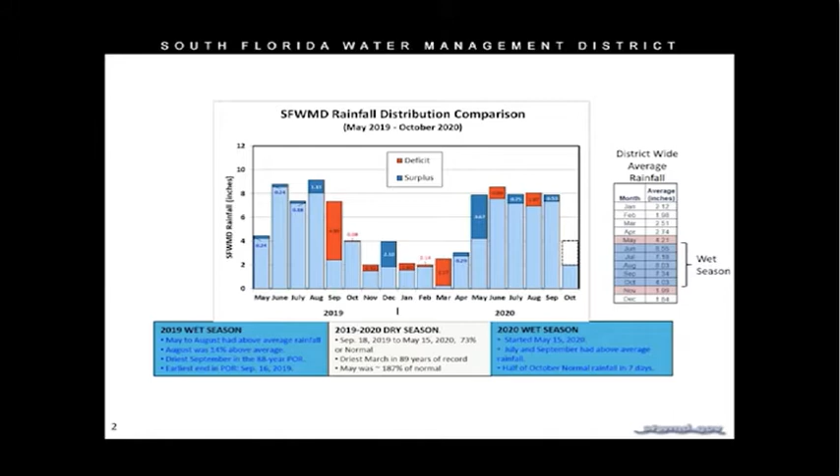These maps represent everything that we saw through September, and we were slightly above average through September in terms of wet season rainfall. But again, when the numbers come in October, all of those numbers are going to go up considerably.

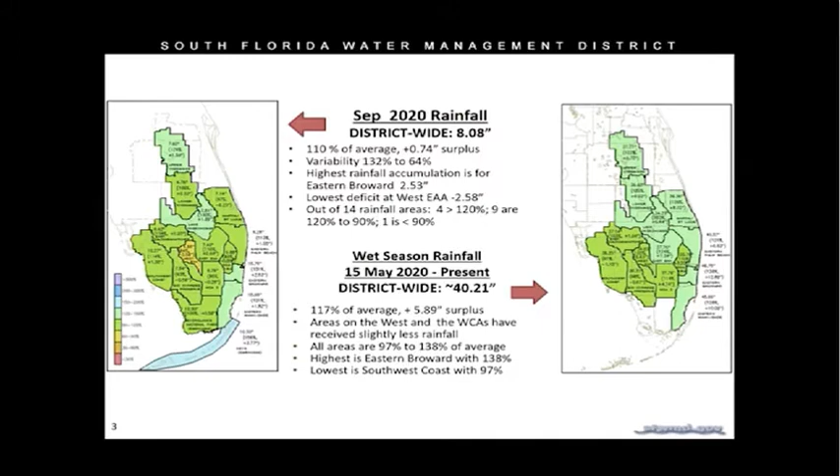So lake level, around the beginning of October, we sat at right about 16. The lake continued to rise, as you are aware, got as high as just shy of 16.4, and then discharges started, and the lake is now receding. So it's on its way down, it's down around 16.1, I believe.

There is a website update that you can go to now at sfwmd.gov that shows all of the inflows to the lake, all of the outflows with directions, how much is going east, how much is going west, how much is going south, evapotranspiration numbers, so you can get the net water budget of the lake anytime you want to see it, and that's updated daily.

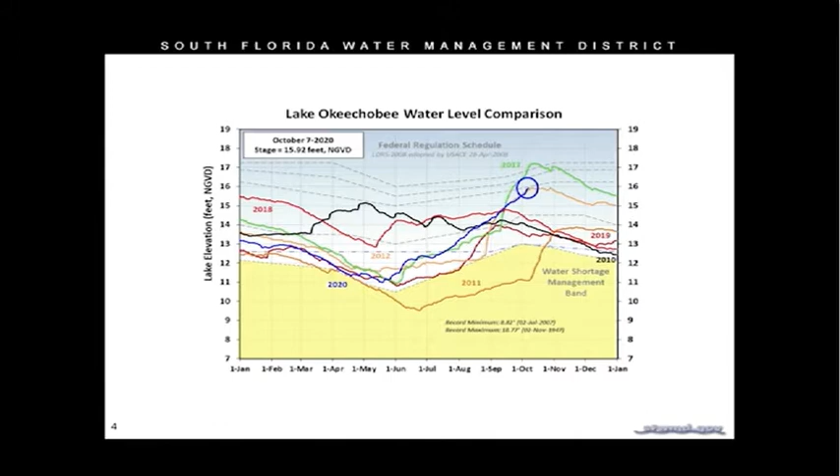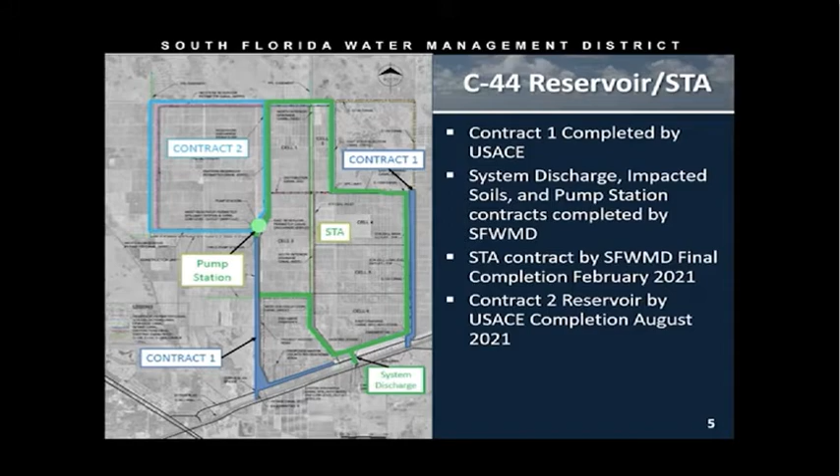And so that's kind of the conditions that we find ourselves in today. Moving on into the projects, some good news. C-44 reservoir and STA, we're down to our final 2 contracts. If I can get a laser pointer going here, we've got the STA, 6,400 acre STA, and then the main reservoir. The last 2 contracts of the project are underway, and we're getting pretty close to completion on the STA.

So this is some of the work that Bergeron has been out there doing. They've got the distribution canal, a lot of the STA embankments, the roadways, control structures, et cetera, finished. And so this is kind of looking at some of that finished product. This is one of the canals that runs straight north and south through the facility.

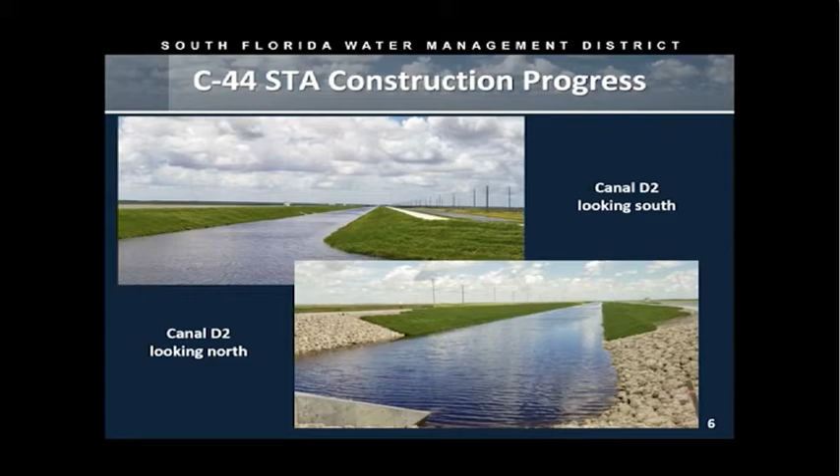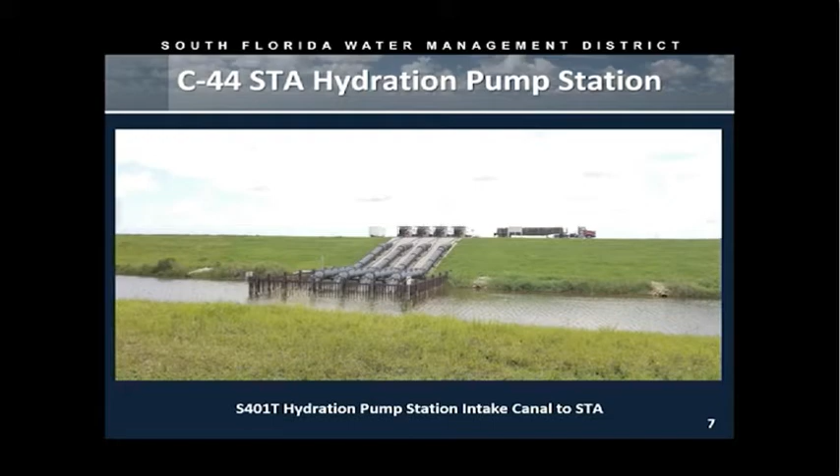This is the pump station, the temporary pump station that we installed that allows us to draw water directly from the C-44. So this body of water connects by gravity to the C-44 canal. Once we get the STA up and running, we can run, well, we've already run these pumps to hydrate some of the STA cells as they've finished. So while the Corps is working on the reservoir, we can take advantage and get early benefits, early grow-in of vegetation in the STA by way of these pumps. So these pumps take water from the C-44 and put it into cell 2, which can feed the rest of the STA cells from there.

We've also got cell 5 done. So right now, the only one that remains is cell 6. Once that's done, we will have met substantial completion for the project, and we can operate the entire STA facility as a whole. Because of those October rains, we were expecting substantial completion to hit right around now. But because of those heavy October rains that you all talked about and that I mentioned earlier, that's pushed some of that work out. So now current projection is that we'll be able to finish cell 6 and hydrate it mid-December.

Moving over to the other coast, to the C-43 reservoir. Very large project. We started back in November of 2015, and it will ultimately store 170,000 acre feet of water on a 10,000 acre footprint, storing water at an average depth of about 19 to 20 feet.

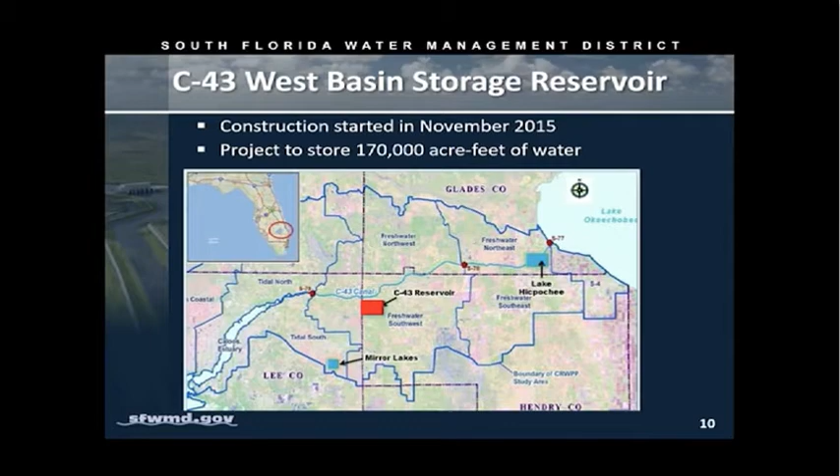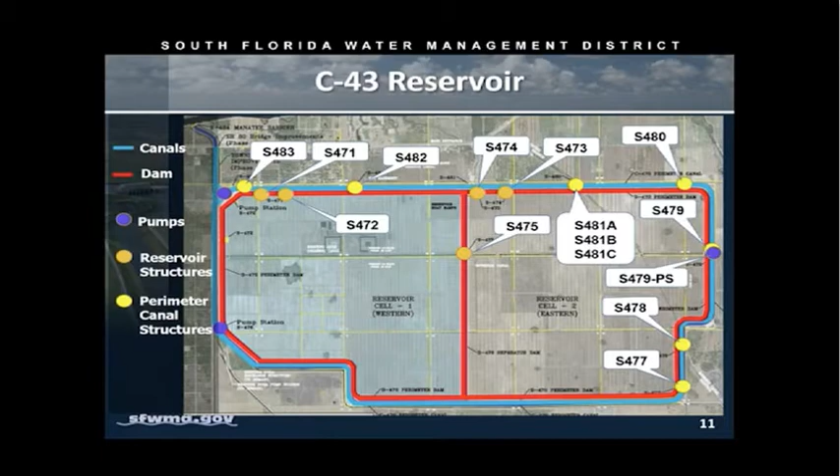And so this is just a refresher showing the key components of that facility. It's a 2-cell reservoir, numerous gravity control structures, a main inflow pump station located here that will draw the water from the C-43 canal into the facility, and then an irrigation pump station that will allow water to continue around the southern end and feed the farms over to the east.

So there's two major contracts going on right now. One is the inflow pump station that I just mentioned. A lot of progress out there so far on this one. The pump gallery walls have been poured, so you'll see a lot of concrete work in the subsequent photos. The 84-inch discharge pipes within the interior of the station have been constructed.

You'll see a partial communications tower. We've got 220 feet of the 300 installed. And then you'll see the improvements to the Townsend Canal that allows us to draw water from C-43 to the pump station. A lot of that work is also in. Just as a refresher, this was a $60 million contract awarded back in March of 2018.

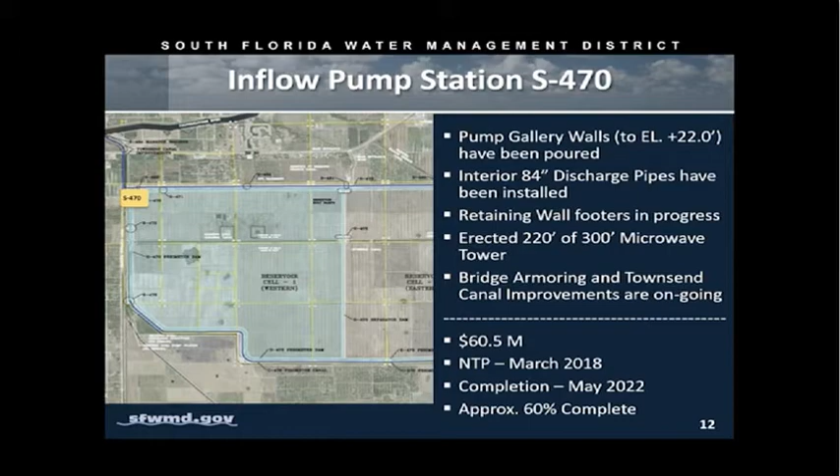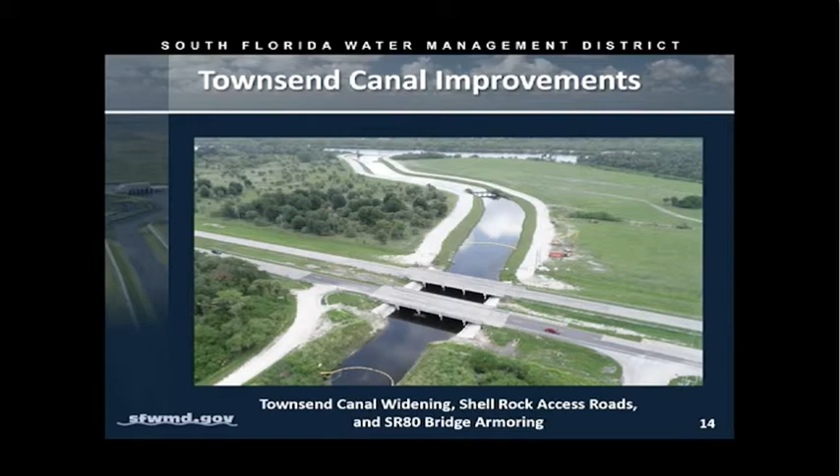An appreciation of the scale. Townsend Canal improvements, like I mentioned, we've got the canal widened. We've got TRM and planting done to stabilize the banks, and we've got armoring that was installed under the bridge to protect that area. This is just so we could take additional amounts of water beyond what the original canal cross-section was designed for out of the C-43 and put it into this facility for storage.

Getting into the large contract, the embankment contract. So there's 19 miles of dam embankment. I'm just going to pick off some of the highlights from this, and 15 miles of perimeter canal. The embankment is highly engineered. It's got a cutoff wall. It's got a drainage blanket associated with it, all for the purposes of dam safety, so that when you store that 20 feet of water on average, you minimize the concern with breaches. Obviously, that's important.

Again, this is a $524 million contract.

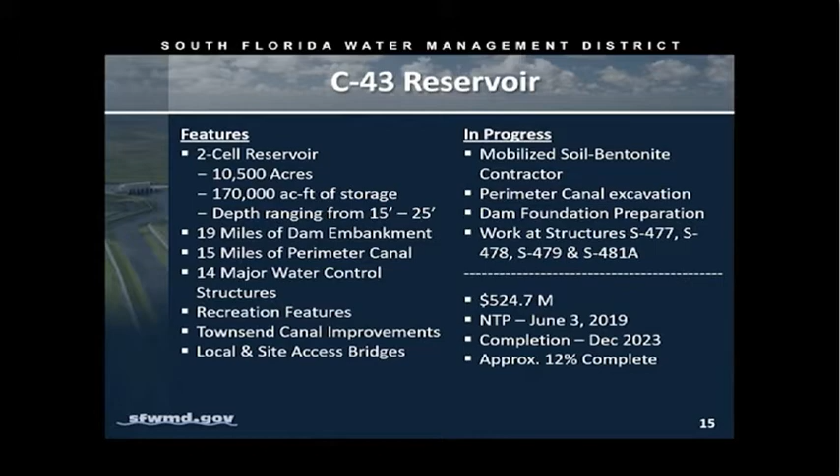And then the reservoir water would be stored over here. So this is the prep work that's being done in anticipation of building up those lifts of embankment. So you've got this clean sand that's being installed here for the drainage blanket, and then you've got the prep here for the soil bentonite cutoff wall. And so you can see the differences in material that are being installed there. And then, as I said, this embankment will be built up from there. So this is just kind of laying the foundation work for it, going all the way around those miles of perimeter that I mentioned.

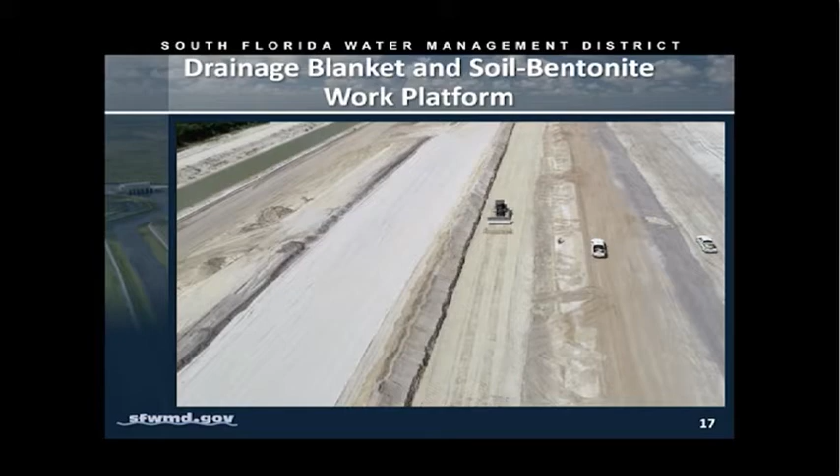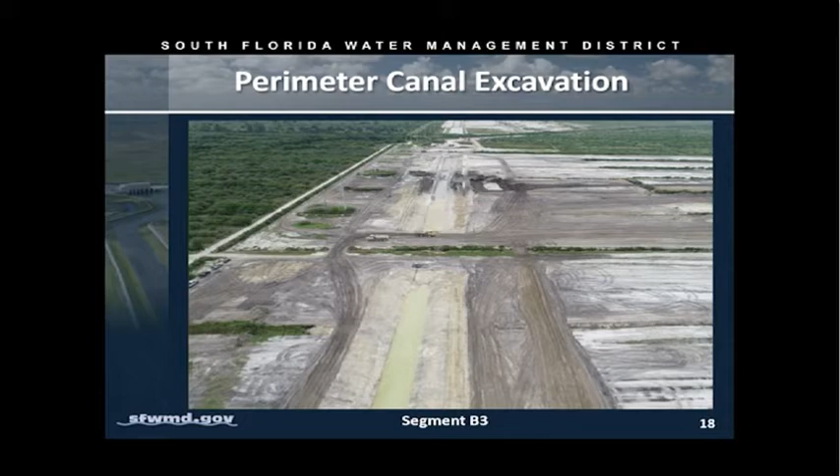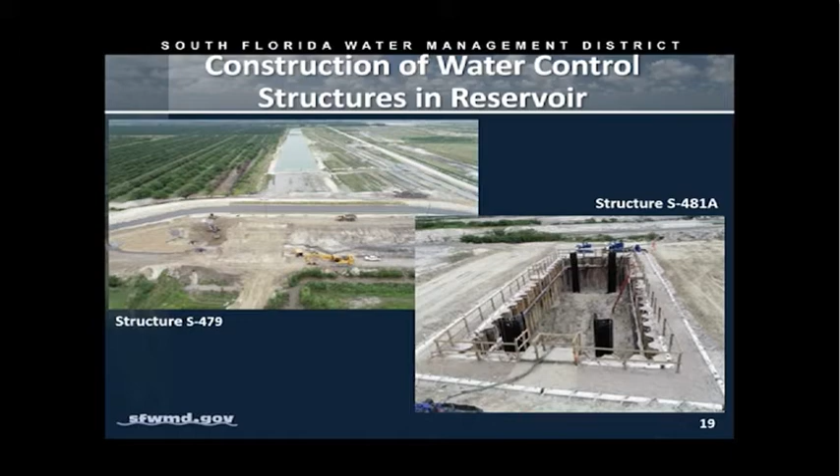And then, so this is just progress photos of that perimeter canal excavation that were shown in that previous picture. And then some of the control structures are underway. There's numerous gravity control structures that stage water from high to low as you work around the perimeter of the facility. And so obviously that work has started in earnest as well.

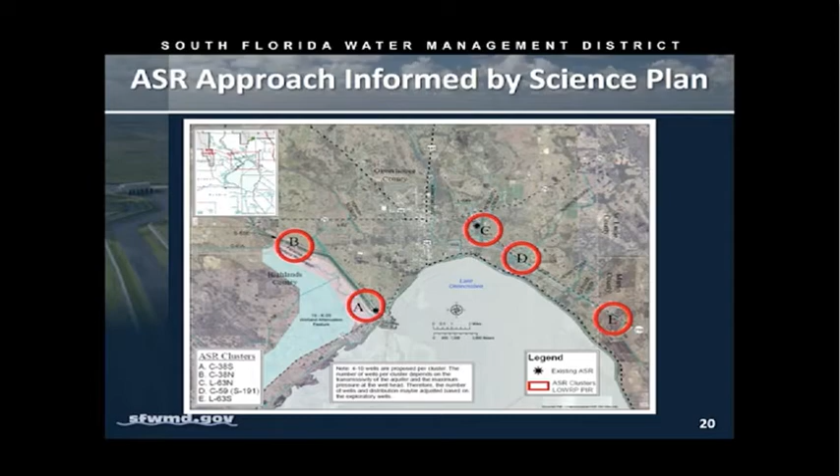Moving on to some storage north of the lake. Our ASR program, informed by the science plan, is moving forward. And so right now, as part of that science plan, we're doing a lot of exploratory work and research work on what's down there in terms of ASR. So as part of phase one, we're completing an evaluation and hydrogeologic assessment at C38 South and North, and then L63, C59, and L63 South.

We're drilling 2,000 feet down in those areas. We're also doing exploratory wells of the upper Floridan aquifer, and we're getting some of the existing facilities that were out there back up and running. The existing L63N and the Kissimmee River ASR pilot were out there, were built several years ago, and so we're doing some work to see what it's going to take to get those back up and running.

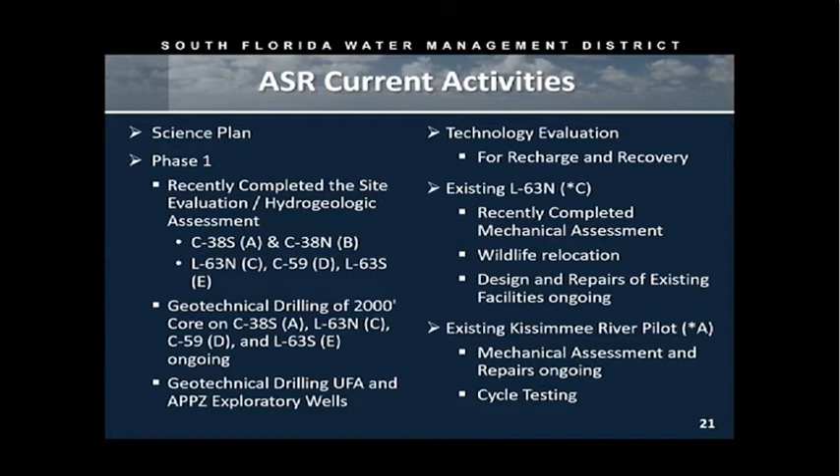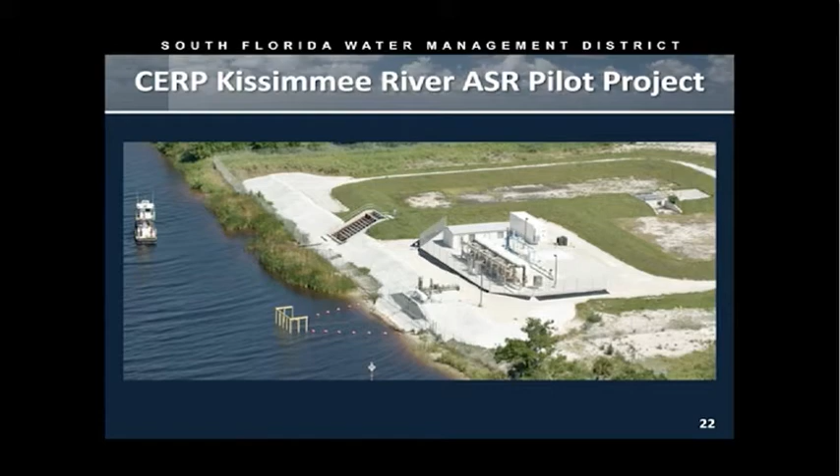And then moving on down to the south, we recently had a groundbreaking and a ribbon cutting for a couple of different features of CEPP South. All of these projects work towards the initiative of getting water out of WCA 3 and down into Everglades National Park. And so the Corps held a groundbreaking on their culvert project, which will take additional water from WCA 3 and allow it to move down to the S333N structure. And then eventually that water makes its way down into the park.

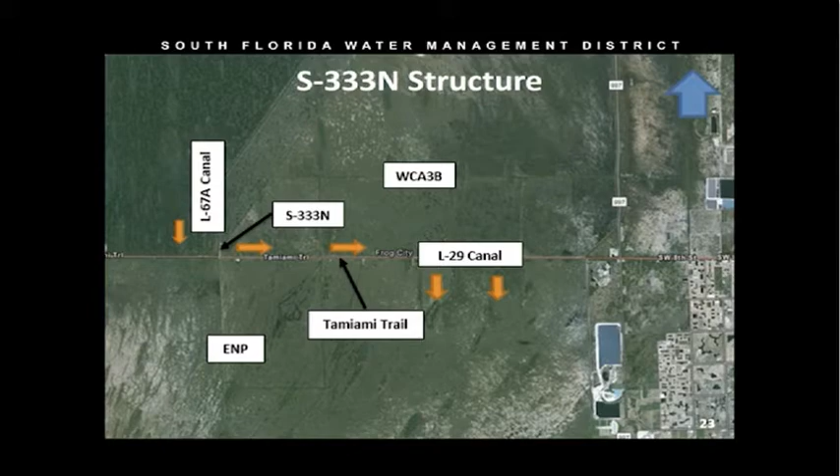At S333N, before there was just this one gated structure, and all of this levee was located here, such that you only had one route for the water to go. So for all this water coming out of WCA 3, it had to go through this single channel. We've since doubled the size of that, allowing us to double the amount of water we can send south to the park. This levee has now been moved over, this channel excavated out, and this brand new control structure constructed so that we double the amount of water that comes out of this area and then moves east and eventually south to the park.

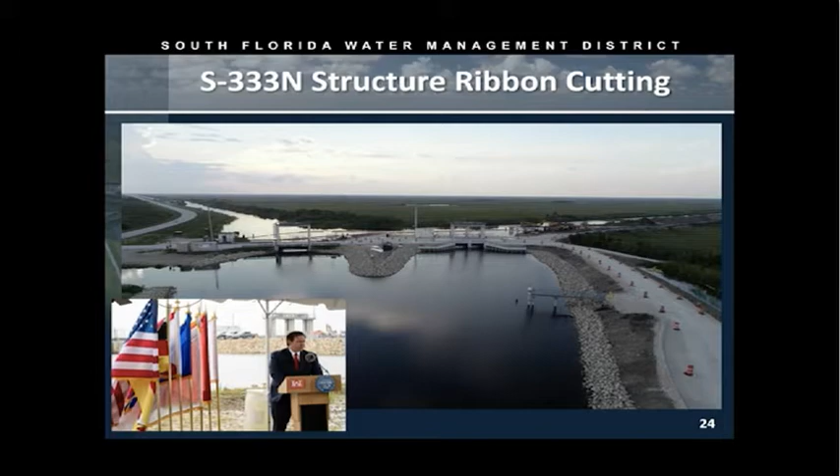Also south of the lake, we've got our Bolles Canal related improvements, which will allow us to send additional water to A1 FEB. We've got segments 1, 2, and 3, and the Jet Farms Bridge and Duda Road are all complete and constructed. The canal has been widened and deepened in those areas. We're currently working segment 4, shown in yellow, and we've got design underway on segment 5 and these 3 bridges. With all of these improvements, the entire reach of L16 between the Hillsborough and North New River will be finished.

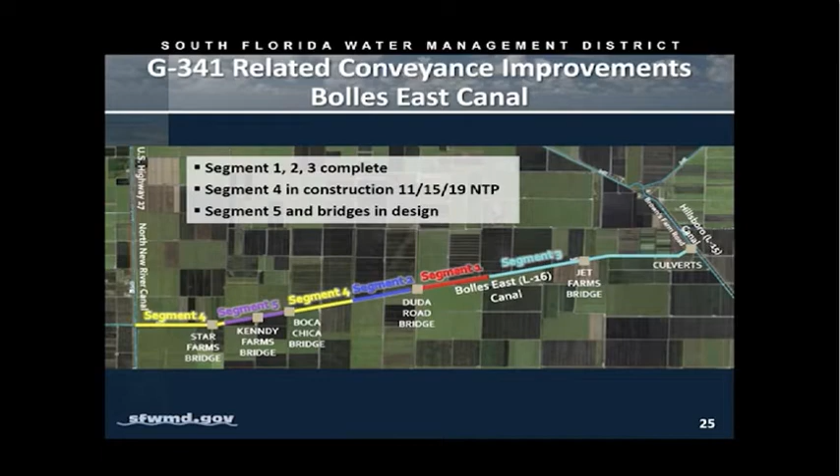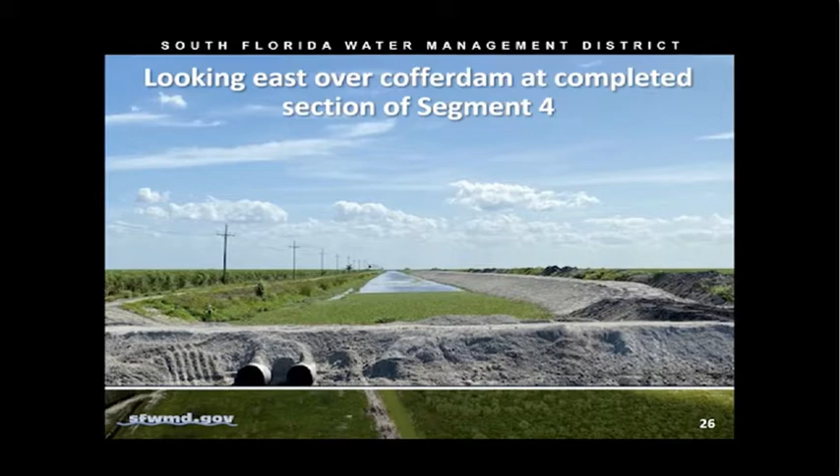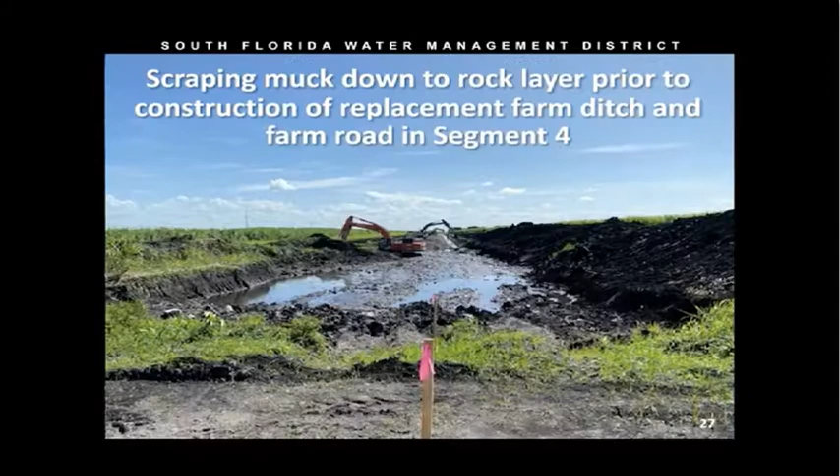This is just a typical section looking at the improved canal once it's been deepened and widened. Before we started out here, this canal was so shallow that birds were able to walk across it. Also off to the side of the canal, we have to replace the farm ditches and farm roads that were out there in order for those operations to continue once the project is done. This is just a shot of that work going on in conjunction with the work on the main channel.

Last but not least, the EAA Reservoir and Stormwater Treatment Area project is underway. This is a project to store 240,000 acre-feet of water in the reservoir and provide a new stormwater treatment area totaling 6,500 acres. The Corps has the lead on the reservoir and some of its associated features, and South Florida Water Management District has launched out on getting the STA piece done. Our focus is here on the STA, located on the west side of the property of the A2, and then the Corps has the reservoir contract.

Let me back up one slide. So as part of the early work that we're doing on the STA, we need to get a canal constructed that will run from the Miami over to...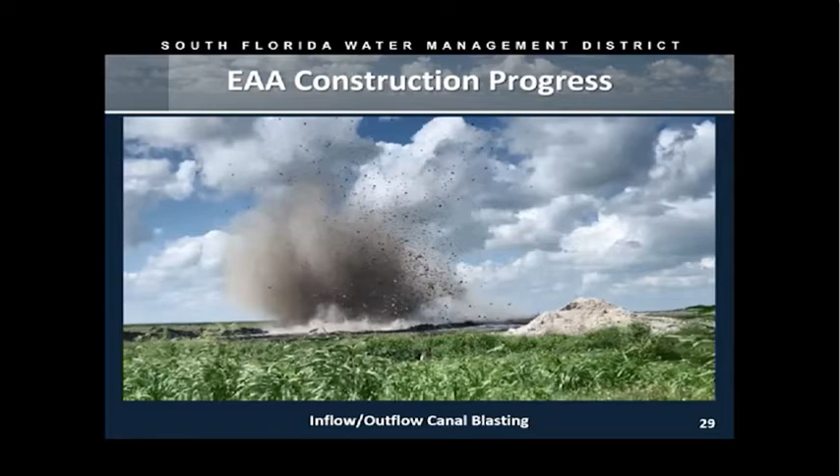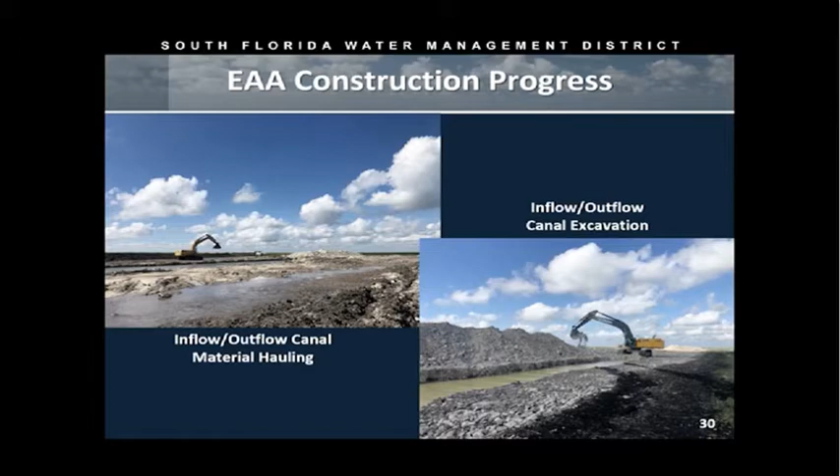It's obviously a highly coordinated setup. The guys that specialize in that blasting do a great job, and you can see it goes right down the line in a timed, progressive kind of approach. They're not just out there willy-nilly blasting holes. It's pretty neat. Once they're done, the excavators can come in, dig out that material, and move it to where it needs to go, and then you've got eventually an inflow canal.

As I said, Water Management District has taken the lead on this STA area, including clearing, grubbing, and muck removal contract of that canal footprint. That's already done - that vegetation removal contract is complete. Inflow-outflow canal construction is underway, and next month we'll be completing the stormwater treatment area design and putting that out to bid. That's for the entire embankment, control structures, and associated levees within the STA.

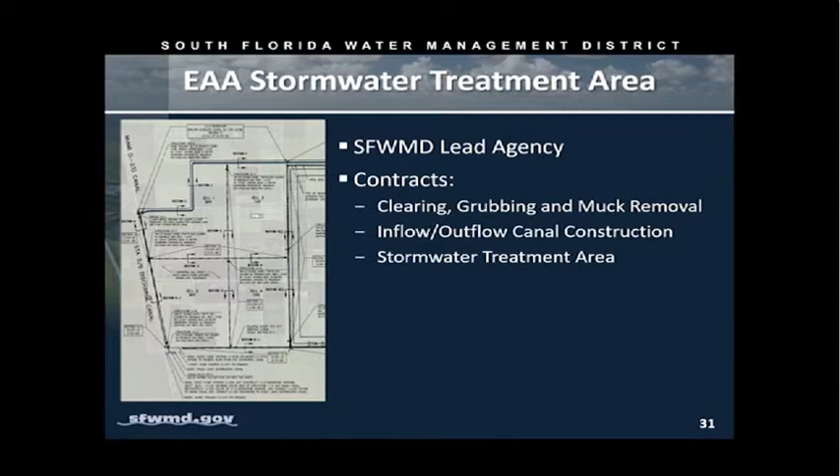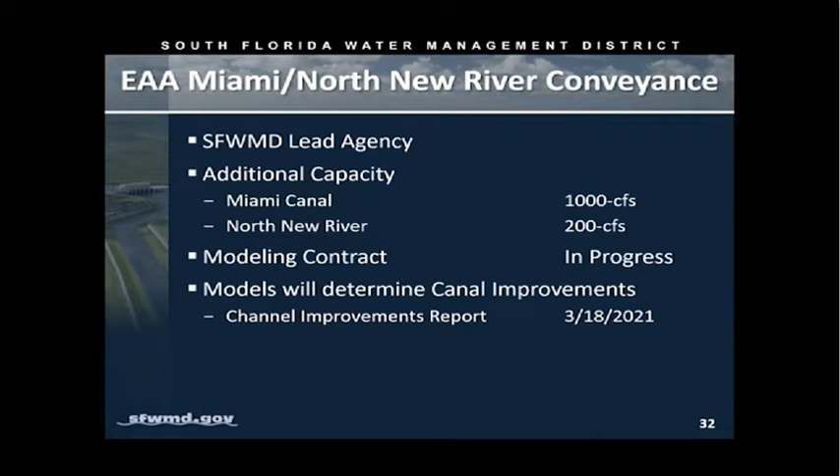We also have to do some improvements to the Miami and North New River canals in order to get that additional water down to these facilities. We're doing a bunch of surveying and modeling right now to identify what improvements are needed to send an additional 1,000 CFS down the Miami and another 200 CFS down the North New River to feed these facilities. We've got a report coming out as a result of that surveying and modeling in March.

As I mentioned, the reservoir side is being handled by the Corps, and they'll have the main embankment contract, also a seepage canal, a main inflow pump station. They'll have bridge widening at US 27 and their own section of inflow-outflow canal, where they're going to basically pick up where we leave off and connect the inflow canal over to the North New River. So basically what you wind up with is a full section of inflow canal that can draw from either source, North New River or Miami.

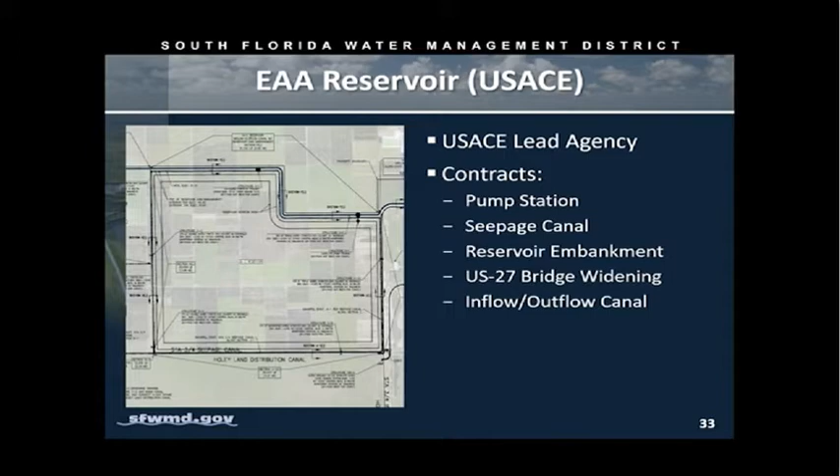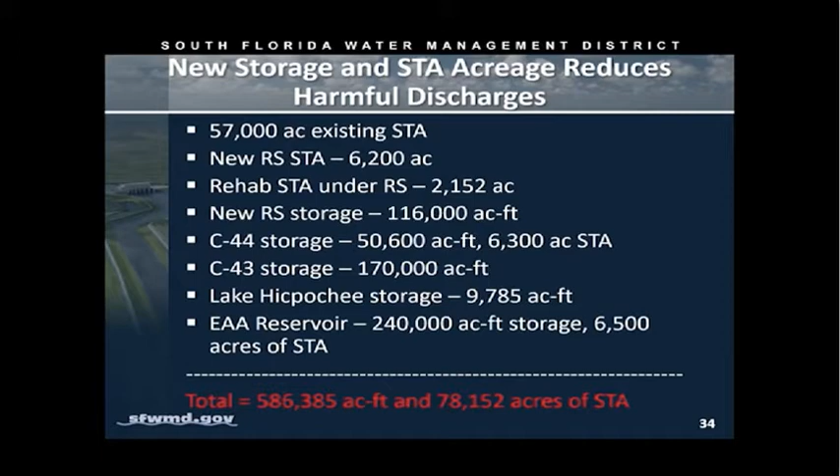This is the slide that Commissioner Smith requested quite a while back, and it's got all of the new storage and STA acreage that's underway and helping reduce the harmful estuary discharges. Since the last update, I believe the only number that's changed is I went ahead and added the Lake Hicpochee Phase 2 storage to it, since that project is now underway. With that, I'd be happy to take any comments or questions.

Mr. Smith? No, just thank you for that. Kurt? Thank you, Mr. Chair. Thanks, Alan, and Drew, really tremendous progress. Really appreciate everything you guys are doing without missing a beat, with everything else that's going on. Certainly commendable to all of you and your staff.

Just on the ASR, I was curious, are we good with that? We're pleased to see that going forward. Is the legislature still supportive? Where are we with support from the legislature on moving forward with the program?

So the last two years, they've given us $50 million per year. I don't know how this year is going to look just because of the funding situation. As far as CERP funding and water quality funding, that's all funded through the Land Acquisition Trust Fund, which is funded by doc stamps, which seem to be doing okay from what I've seen. The ASR technology has been funded by general revenue at the legislature the last two years, which is going to be more difficult. But I've seen a lot of legislators be supportive of it, and I think, as we know, the solution to a lot of the problems down here is storage on all four sides of the lake.

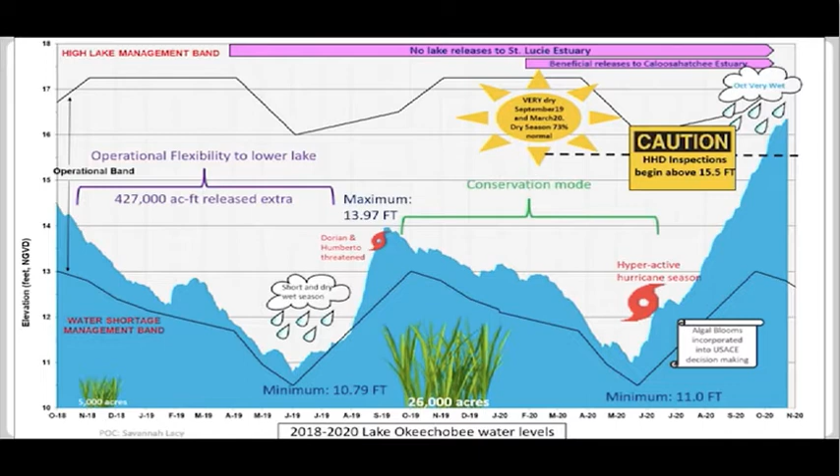Unlike the past couple of years, we're walking into the dry season significantly high. We've got a La Nina on the way, which, if you believe that, looks like it might be a bit drier than normal. So as soon as I can get out of this day-by-day decision-making process, we'll articulate our long-term strategy to get back to where it needs to be at the end of the dry season, so we're in good position again next year. More to follow on that for sure.

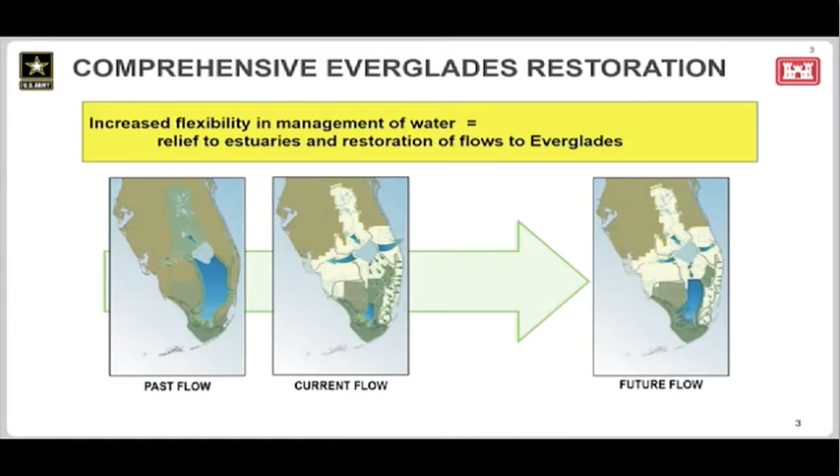Now I'll switch gears and go into the broad picture of Everglades restoration. I think everyone's seen this - this is kind of where we're trying to get to: the historic system, what the current system is doing, and what this enormous program is trying to get after. I will burn your eyes with an eye chart right here.

We do this publicly - we just announced at the Everglades Task Force the integrated delivery schedule. The only thing I'm trying to highlight here is this year's IDS. We put a big focus on trying to relate the plan, the 2000 yellow book, to the current actions, current projects, and upcoming studies. We tried to do that direct linkage, and we also tried to demonstrate, on the backside of this, where the operations manual and the execution of moving water actually occurs.

Typically we finish a project, we have a period where we develop the manual, and then we start execution of the manual. What we're trying to do in each of these is get a lot more adaptive management and flexibility into those manuals to handle the one-offs. So it's not a specific issue where on a given date three years from now we know a structure is going to close - that doesn't work. It guides us in the big picture. The models show us what's happening, but we've got to have more flexibility in how we operate each of these once they come online, because we're in that period where we're putting a heck of a lot of infrastructure on the ground.

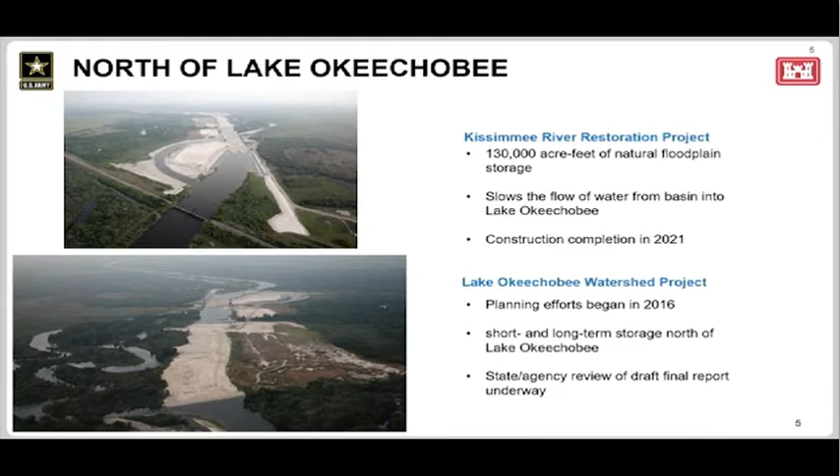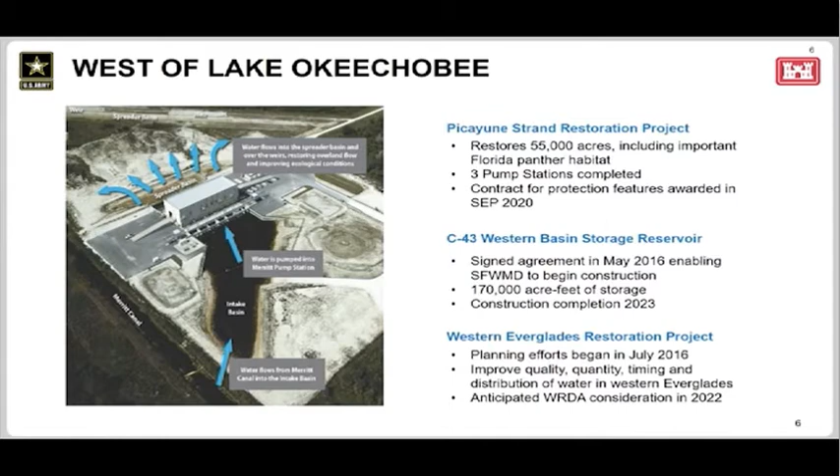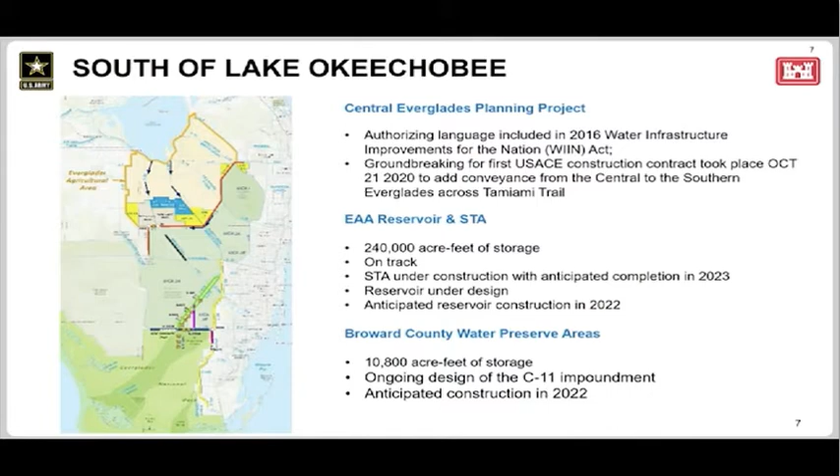And then Broward County Water Preserve Area - construction beginning in 2022 is where we think that one stands.

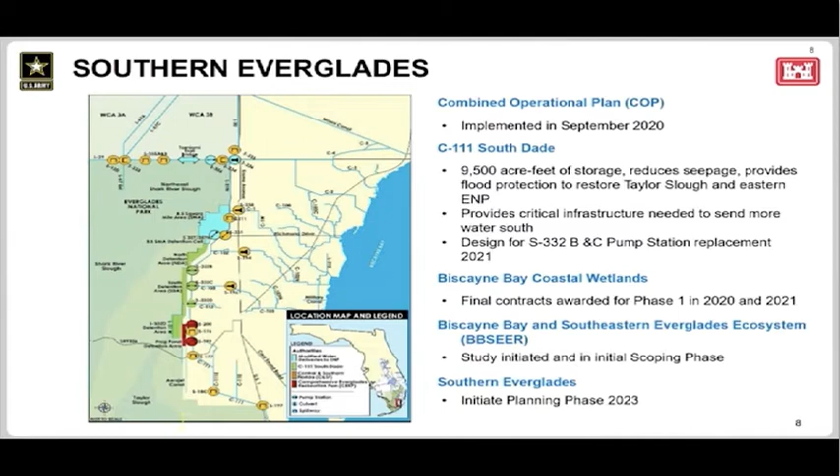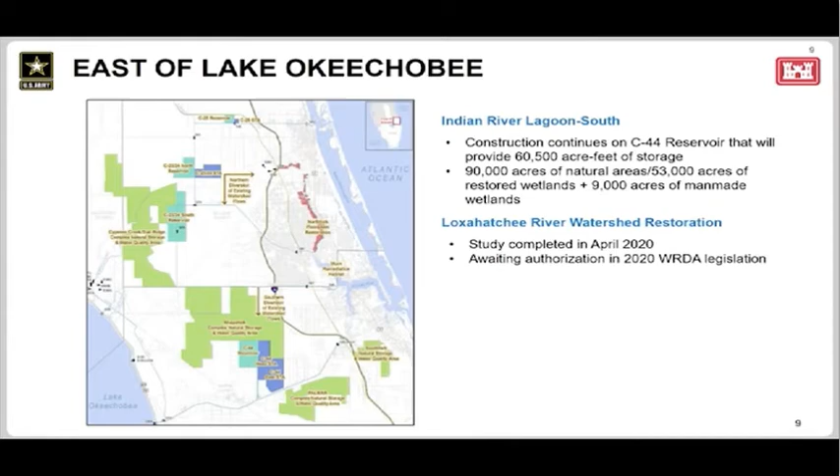And then on the east, the C-44, I think I got one slide on that next, going to make a huge impact, it is really coming together. And then the Loxahatchee River, we signed that chief's report. We're waiting authorization. We think that's got a high chance of getting authorized, and then we can start that one.

So on the Indian River Lagoon South, whoops, sorry about that. So I'm not doing that. Okay, one more time, and then I'll just talk it.

Okay, so a lot of pieces on Indian River Lagoon South. Really took the additional resources we got in this latest budget round, and so that has become a primary effort of us as we go forward on getting all of that done.

I am not doing that.

And then that C-44 specifically, huge effort, learning a ton of lessons. Every time we're building these things, there is absolute connectivity in the lessons we're learning. Soil cement, just as an example, one simple construction example, was challenging on this one. It took us a couple of months and the contractor to get that right, and we're already applying those lessons with South Florida on C-43, the seepage canal systems, how we're sequencing the work, and how we're learning from these ongoing activities is pretty fantastic. So the collaboration is great.

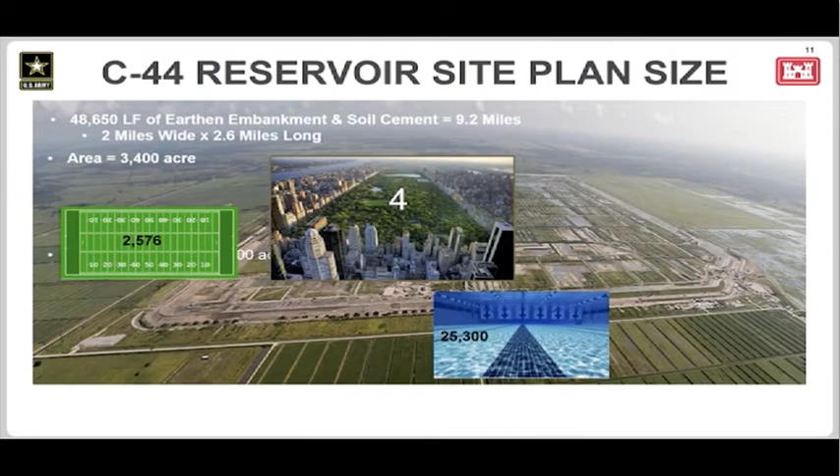And then just a couple of pictures. I have to use this a lot, especially with my friends in DC, to explain this isn't a small thing. Four central parks, that's how many Olympic swimming pools, and that's how many football fields. So just giving them a sense of scale at the infrastructure we're putting in the ground right now.

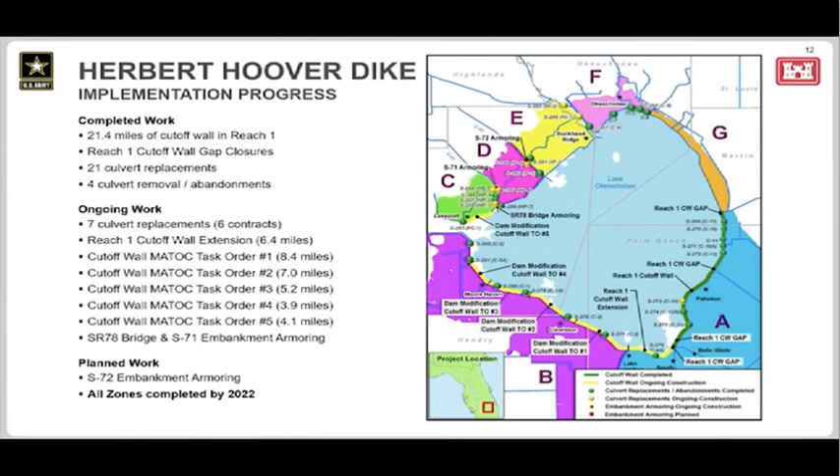Herbert Hoover Dike, fantastic story. With the help of Florida, when Florida basically gave us $100 million and said 'cut it out, go faster,' that kick-started us, and we were able to move this completion 3 years earlier. We're currently under budget, and I'll highlight all the green dots, all those green dots are things that are done. The yellows are what's under construction, and what we learned from Dorian and what we've learned this year is that we are achieving incremental gains. Everything we complete makes the dike safer and allows us more flexibility in our water management. We are absolutely on track by 2022, and that'll pave the way for an operations manual so we can change the way we manage water on Lake Okeechobee.

I'll highlight that next, so LOSOM, Lake Okeechobee System Operating Manual. This is really, in effect, changing how we manage water out of Lake Okeechobee. What we've done is we've made these objectives and put those goals, but what we didn't do is we did not constrain anything on this study. The typical methodology is you say, okay, we know we got to hold for this, we got to constrain the system here, we got to constrain it there. We threw all that out the window. What we just finished was 120,000 model runs. I haven't seen it yet. I was told I could get it as soon as I get back to a good connection.

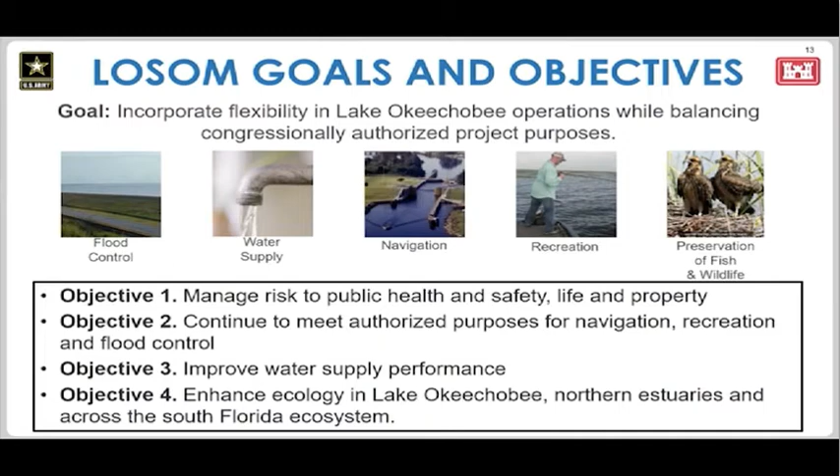We've got basically a spreadsheet that runs 120,000 different models of how to do this, all of the extremes. So let's pretend no one cared about flood control, and let's run a model for that. You've got an extreme on one end, an extreme on the other end, and everything in between.

That really will set the baseline, and then come January, February timeframe, we're going to get to a kind of initial array of schedules. We're going to weed that 120,000 down to about 9 or 10-ish really plausible ones. We know the extremes can just get thrown out because the system has to be in balance.

The purposes and authorizations for Lake Okeechobee are definitely balanced, and we know some of those authorities and purposes for managing Lake Okeechobee are sometimes at odds. So we balance the system, and we'll work between now and March to get that set of schedules.

We are doing a phenomenal job with the public. Every time we do what we call a project delivery team meeting, we get about 200 participants. So we are getting absolutely all of the input we need, and we're working through all the challenges, and we're happy now that we've got that kind of 120,000 model runs.

People are going to be able to start using data instead of kind of arguing at a talking level, a conversational level about the needs. We're going to be able to look into the data, drive that through to March, and we will have a schedule that we tentatively select by July.

So we're going to put a stake in the ground in July that says, okay, this is the best one. Then between then and 2022, we'll have plenty of discussion about if that's right or wrong and tweak that as we go. But I just want to highlight that there is so much interest and communication going on, it's going to be hard to screw this one up.

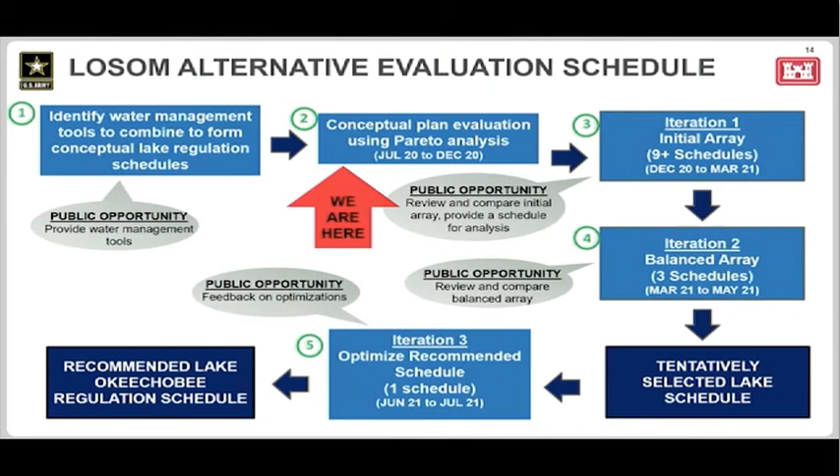This year has been fairly good for us on the West Coast without having releases during the wet season. We understand the reason why you're doing them now, and we are getting the bulk of those, as you well know. But if it had to come at any time, this is probably the best time in the season, as we're headed to the dry season and not getting a lot of basin runoff, so no algal blooms like we've had.

It's good news to hear that they may be stopping within a week or so. So hopefully we'll have the lake at a level entering the dry season that we'll be able to get the environmental releases provided to the West Coast that we need during the dry season.

I think you were able to do that last year. But the flexibility you and your operators have shown has certainly benefited our estuary, our region, and we hope you keep that up, and we appreciate the hard work that you're doing. Thank you. Thank you, sir.

Yeah, we're absolutely committed. We're committing to shortening the duration. If I were to prognosticate now, which I will not do at the media call later today, but if I'm looking into my crystal ball, we're looking ahead and trying to figure out, as we walk into the dry season, where's the best place to be.